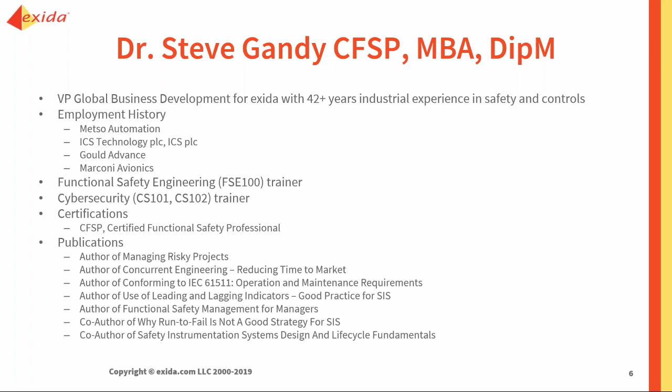Now, with that being said, let's get into the meat of the presentation. So the question is, do you follow good site safety practices? And this is a question that I often ask when I'm teaching the class with end users, because most end users, certainly managers, if you ask the managers, they all say, yes, of course we do. But if you ask the actual maintenance people or the operations people, they have a somewhat different view. And again, what do we mean by good site safety practices?

Well, in this case, it's how well do we carry out the work of maintaining mechanical integrity and also repairs. And here again, if you've ever looked at the Chemical Safety Board accident analysis, the videos they have, and they're very good videos and the animations, you would see that in most cases there have been lapses or severe lapses in the approach to doing mechanical integrity and maintenance.

And in some cases, it's just a case of ticking the box and just making sure, okay, yeah, we've looked at that, that's good, let's move on, without actually implementing proper repairs. So it's more or less just putting a Band-Aid on something and not really following through to make sure it's done properly and it's been properly reassessed.

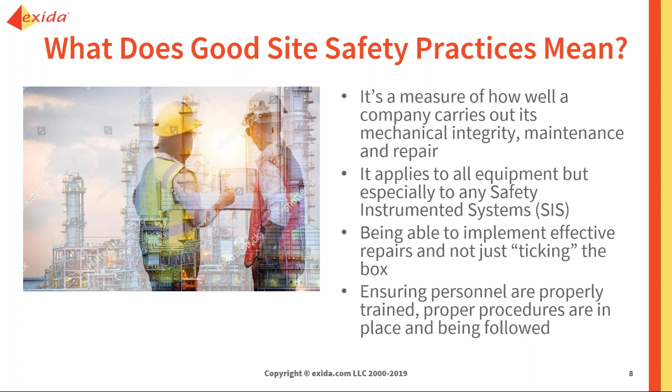Systematic errors are insidious. They can only be removed or avoided by one of the 3 Ps, which is making sure that the personnel involved are competent and trained to do the work, making sure that the procedures in place are being followed, and that we have a paper trail. The 3rd P is the paper trail, to make sure that we can prove we're doing what we say we're doing and we're doing it correctly. So this is all part of maintaining good site safety practices.

And do you actually know how good your practices are? Because again, most companies don't really measure it. And as you can see from this picture, this is a pretty unique situation. Well, not unique actually. It's a situation that can occur. Is he following safe practices? Absolutely not. So again, as I've said, if you ask many company managers, they believe that they do follow good site safety practices. But again, that's a view. They don't necessarily have the metrics in place to be able to measure it and to be able to show that they're doing it correctly.

So there is a simple method that we can use, and that is using a site safety index model, which is basically a sort of semi-qualitative way of assessing what the capability is.

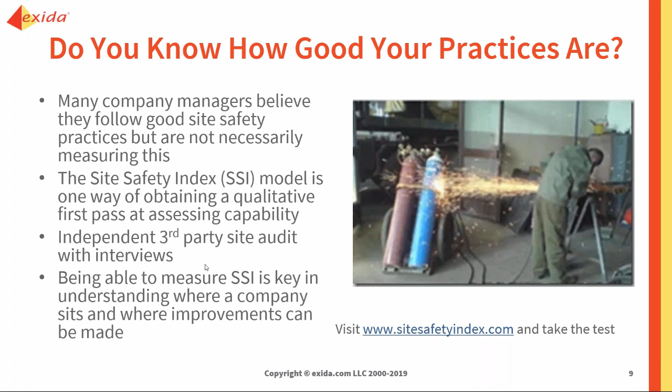And we do actually have a website that you can visit, which is called the Site Safety Index website. And that has, I think, a list of about 40 questions that you can go through. And again, it's semi-qualitative. So you'll get a feel for where you sit. And it's a first pass.

So why is the SSI important? As I mentioned earlier, when the Chemical Safety Board has looked into some of these accidents, what they've found is that oftentimes there is a combination of things, such as there's a poor site safety culture. Management isn't really committed to doing things correctly. They're more interested in efficient operation and keeping the cost down as far as possible.

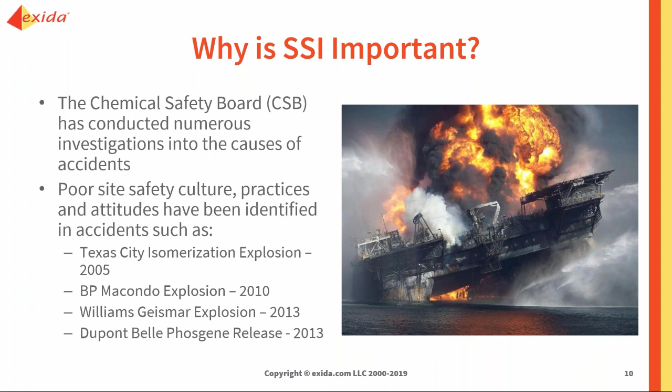The other thing is the practices and attitudes. These have also been an area where things have not gone well, and again, that can be linked back to culture. If the culture is punitive, in terms of we don't want to hear that there are problems, you just get on and do what you need to do, we just have to keep making money and keep our costs down. And when you look at these investigations that have been done, you can see Texas City is an example of that, even Macondo, and then the Geismar explosion in 2013 and the DuPont Belle phosgene release in 2013. Those were traced back to poor site safety practices.

So what is this SSI model? Fundamentally, it's a simple qualitative model that's using concepts from 61508. And there are 5 levels. We talk about SSI 0, where virtually nothing gets done properly. You know, repairs are not always done. This is where the culture is not good. Manpower may be low. They've got too much to do. Yes, they know there's a problem. We'll leave it in bypass. We'll get to it whenever we can get to it. So that's the sort of thing.

The testing isn't done. There's normally a run to fail policy where equipment isn't replaced until it fails. And we know that when it comes to safety instrumented systems, that's a no-no. You have to make sure you follow the useful life of the devices in each of the SIFs and make sure that those are either replaced or refurbished when they get to the end of their useful life. So that means you have to have a good tracking system and you have to follow good maintenance and mechanical integrity. So from 0, you go up to 4, which of course means you're doing everything correctly, you're using data correctly, you've got everybody trained, and this is the highest possible level you can get.

Now, in our exSILentia tool, we do have the SSI included in the tool. It's part of the Markov modeling. And we normally assume good. So it defaults to SSI 2, where repairs are usually correctly performed. Testing is done correctly and mostly on schedule. Most of the equipment is replaced before the end of the useful life, and it's selected according to specified environmental limits and process compatible materials.

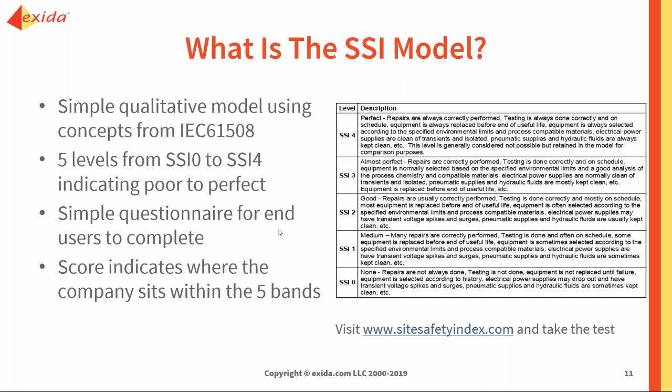So what are the important factors that can impact our site safety index? Again, part of it is equipment selection and qualification. If the equipment hasn't been selected correctly for the environmental or the operational conditions, then you might argue, well, why would you not select the right equipment? Well, sometimes that happens, that the engineering company isn't fully aware of the end operating environment, and if it's not in the specification, then this can be a problem, because it means we'll probably have more breakdowns, more failures, and it'll require more attention.

How well the testing was done during commissioning. If there wasn't proper and thorough testing, we may end up with problems turning up later on during operation. The safety validation test, if that wasn't done properly. And again here, if we have a safety instrumented system and we are following 61511, we should have done an FSA 3 before we start up. And I have had discussions with end users who have not done FSA 3s. They've done a PSSR, but they haven't done a proper validation.

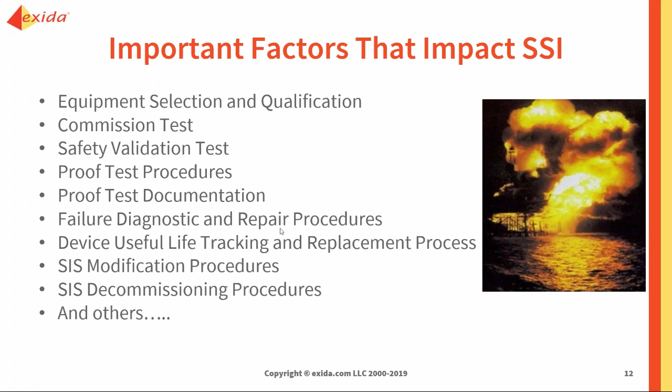So here again, we could do our analysis right, we could design our system correctly, we could have our SIFs all nicely designed to meet the right SILs and everything else. And once we get into operation and maintenance, if we don't do the maintenance according to the SRS requirements in terms of the proof test intervals, the mean time to restore, tracking useful life, making sure we effect proper maintenance, we keep records, all of that will very quickly deteriorate.

And this is one of the reasons why in the 2016 edition of 61511 they introduced the requirement for a stage 4 FSA. I just did a webinar yesterday on why do we bother with FSAs. But the stage 4 FSA requirement is to be able to look at our performance. Remembering, of course, that the 61511 standard is a performance-based standard.

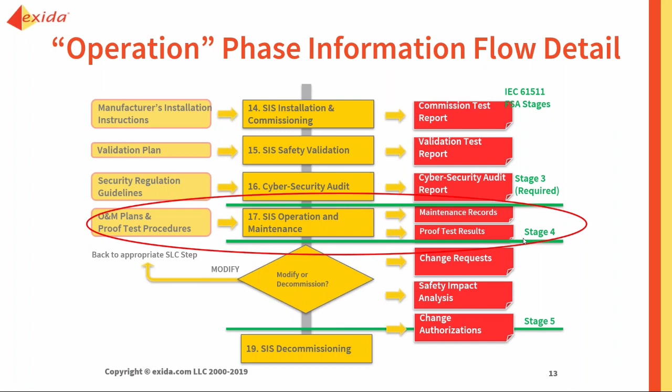So all of that information can then be used in the PHA revalidation, especially when it comes to initiating event frequencies, to see, okay, did we get it right the first time or did we not? And we can modify accordingly. So again, if we don't have the proper performance indicators available, we won't be able to measure performance. And then again, if we're not following good site safety practices, then we are going to have problems, and we won't achieve the performance that was originally intended from the original design.

As I said, we're performance-based, so therefore we do need to measure. We need to know how well our SIS and its SIFs are doing in terms of the risk reduction. Is it still performing the way we need it to perform? And that means we have to have the appropriate metrics in place to do this. You can, of course, use leading and lagging indicators. There's another webinar completely dedicated to leading and lagging indicators, plus there's a paper on the website on leading and lagging indicators.

But ostensibly, lagging indicators are things that have happened in the past that we can learn from, whether they're incidents, real or otherwise, near misses, maintenance issues and problems, failures. All of those things are historical, and we can use that because if we've been getting a lot of these problems, we should be able to reduce them. The leading ones are to give us an indication of the likelihood of having a problem in the future.

And of course, for example, if we're not doing the inspections correctly, if we're not doing our proof testing on time, if we're not training our people, if we're not doing the assessments that we need to be doing, then the likelihood of having a future event is now beginning to increase. So this is why it's important to be able to measure the performance.

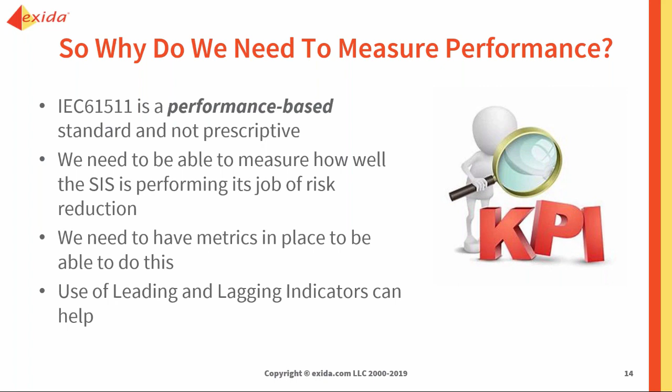And this comes back to what I was saying about the site safety capability and it hinging on the two things being culture. And again, if the culture is not there, it is very difficult to be able to go to management and say, look, I have to replace these devices because they're coming to the end of their useful life. And if the manager says, well, why? Have they failed? And you say no, then of course the pushback is going to be, well, why do I need to change them if they haven't failed? Why should I spend that money?

So this is another problem, and that plays into the ability of maintenance people to be able to follow good site practices. So therefore the management team has to buy in and support the overall process safety approach. This also means that we have an open and learning culture because, again, if we're using our lagging indicators and we've had problems in the past, we should learn from that and be able to modify accordingly, whether that's some further training that needs to be done or whether it's a revision of procedures or the addition of new procedures, whatever it takes to do it.

So doing things right and doing the right things should be the mantra. And what do we mean by that? Well, we make sure that our O&M personnel are properly trained and that they are following the procedures. If the procedure is not correct and you find that they're not following procedures because they believe the procedure to be cumbersome or it's not written correctly, then that needs to be looked at and that needs to be changed because that will be a potential systematic issue.

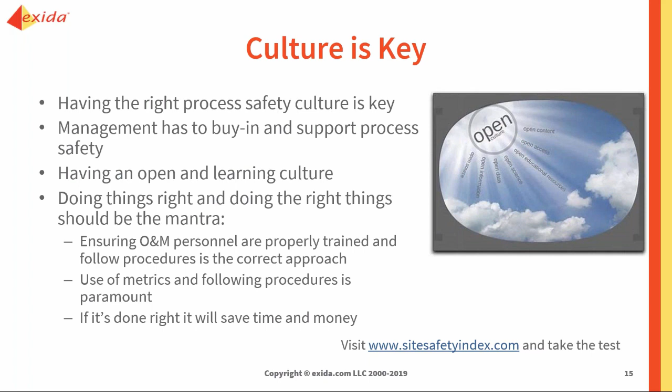If we have the right metrics in place and we're following our procedures, then we should be able to accurately measure our performance. And again, if it's done right, it will actually save time and money. Here again, what you find is that companies that are at the lower end of the SSI spectrum experience more outages, more downtime, because they have a lot more spurious trips or they have equipment failures. So that costs money, plus every time you have to start up, that is a potential high risk situation.

So what are the specifics? As I mentioned already, we have to carry out an FSA 4, and it uses the word periodically. And you can set the time. End users can set the time. Whether you decide to do an FSA once every 5 years, whether you decide to do it once every 2 years. I've had situations where companies will look at, okay, if we've got SIL 3, we need to be looking at that probably more frequently.

But again, it's really down to the overall performance. If we're not getting a lot of incidents and problems, then the 5-year window may work. If we're getting trips and problems, then maybe we want to be looking at it much more frequently than 5 years. So again, the point is that the end users can set that themselves. However, they need to do it. It needs to be done. So we should be doing that. And I have actually been doing some FSA 4s for some clients. I mean, it's been 3 years since this came out with the 2016, and still companies are not doing it.

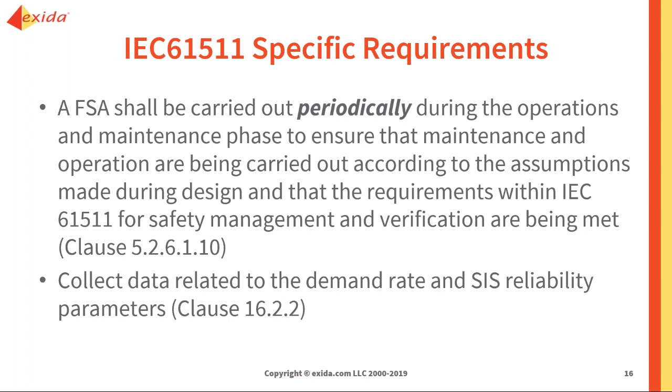So what needs to be measured? Again, when we did the design, we identified key parameters. So of course, proof test intervals. Everybody hears about proof test and proof test intervals and what is a proof test and what isn't a proof test. Let's not confuse a proof test with a functional test. And a proof test should be designed to find potentially dangerous faults that any automatic diagnostics can't find.

And this is where, when I teach the class, the euphemism I use is RTFM, read the flaming manual, because the safety manual will give you suggested proof tests. If you're using exSILentia, then you can do that automatically with the tool. But if you're not, then you need to be looking at what the manufacturer's recommending for the particular device, and then create a proof test for the overall SIF that will meet a certain level of coverage in terms of the ability to find potentially dangerous faults.

So it's not a functional test, it's an entirely different test. It may encompass part of the testing we would do as a functional test, but it's not there to prove that the SIF works. It's there to find potentially dangerous failures. So it's important that we follow the timing.

And here again, I had one client that came to us because the engineering company, in order to meet the target SIL, had come up with a 3-month proof test interval without consulting the end user. And the end user was telling me, well, there's no way with the number of SIFs we have and number of people we have that we can do 3-month proof tests. So we're already set up to fail. So again, that has to be looked at pragmatically.

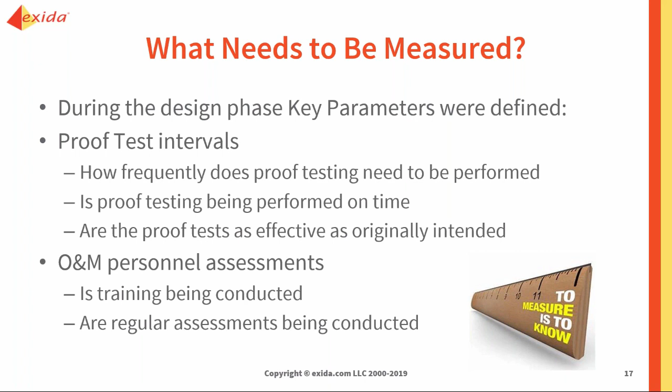So what do we need to record? Well, we need to look at demands on the SIS, whether they're actual, real or false, and then any incidents or near misses. So if a relief valve goes off, that's obviously something that's not right. It's an indication that all is not well. And then we need to look at that and find the root cause of that. We obviously need to record both random and systematic failures.

This is an area that gets confused very often because most of the time people think that failures in the field are all systematic. Not necessarily. And in fact, when we do our probabilistic analysis and calculations, we base that on random failures. So the adage that I suggest to most of the training classes I've done is that the assumption should be random until proven otherwise, because then you log it as a random issue, and then later on, if it turns out to be a systematic issue, that's different.

So for example, if manufacturer A has a pressure transmitter and it fails in one of the SIFs, and we replace and restore, and then 3 months later the same manufacturer's device but in a different SIF fails. So again, these would be random, but now there may be a potential systematic: why is this particular manufacturer's device failing? Is it because we're not using it correctly, it's not been set up correctly, or is it not really suitable for the application? So these things would have to be looked at, and that's part of getting down to the root cause of it. Proof testing, recording the results of proof testing, including the as found.

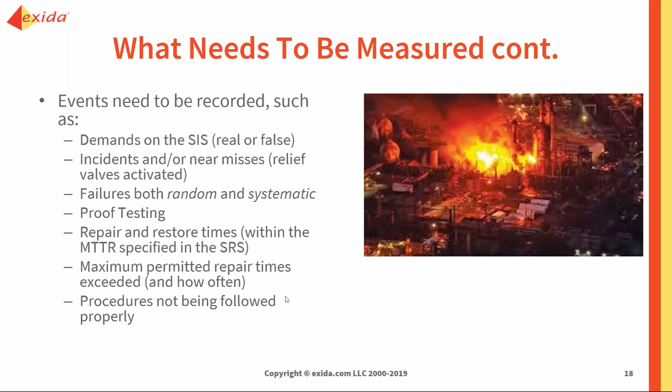And are the procedures being followed? If they're not being followed properly, then that's another issue that we need to be able to track, analyze, and then correct. So this comes down to, again, our site practices. As I mentioned earlier, with this performance measurement, if we've got the right approach in terms of culture and practices, we should be gathering good quality data that we can use when we revalidate our PHAs. And like I said, if you're an OSHA PSM site, you have to revalidate every 5 years.

We can also, at that point, assess whether the proof test intervals are still valid or not, or can be extended. If our performance is better than we originally anticipated, then we can look at potentially extending out the proof test intervals, which will save us a bit on maintenance costs. It'll also enable us to confirm any assumptions that we've made on the demand rates and the hazard frequencies. How often are things occurring, and are they within what we originally thought? So this is another reason.

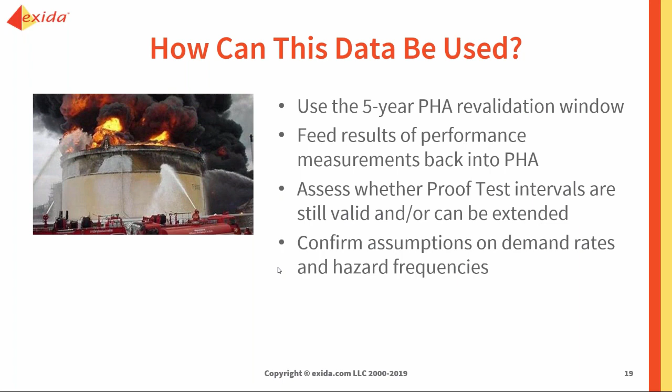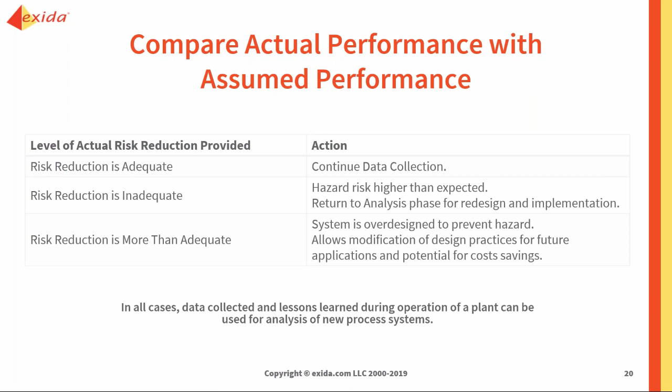And this again comes down to, if we're following good site practices, doing maintenance and mechanical integrity diligently, recording everything, then we should have good data that we can use. Because what we want to do is compare the actual performance with the assumed performance from the original design. So is our risk reduction adequate? If it is, fine, we can continue collecting. If it's not, then we can go back to the analysis phase and look at maybe a redesign or some form of change. If the risk reduction is more than adequate, a potential over-design where we've overestimated the hazard frequencies, then that allows us to modify our design. But the point is that all the data collected and the lessons learned during plant operation can be used for analysis and for future performance.

So that then brings us to summarize where we are. So if we have the right approach in terms of culture, in other words, a safety-first culture, where we have properly trained and competent O&M personnel with good or better site safety index capability, in other words, we're getting towards SSI 3 and SSI 4, that's where we want to be. We should be making sure we monitor this, and we can do that as part of an audit. So when we do our performance reviews, we can also look at how well are we doing from the site safety point of view, site safety index point of view.

This means that we need to have the proper operating and maintenance procedures in place, and that they're obviously being followed. I'm a great believer in checklists, those people that have been on the course have heard me say this so many times, but I always refer to the pilot analogy, that commercial pilots, doesn't matter if they've been flying umpteen thousand hours, every time they get in the cockpit, they don't rely on their memory. They get out their safety checklist, their pre-startup checklist, and they go through it and make sure that it's correct.

And therefore, if we develop a safety checklist, then we can ensure, number one, consistency, and number two, we don't miss anything. We can also look at developing and maintaining some leading and lagging style indicators. That's very helpful and useful. We should be doing the regular employee competency assessments, and again, that would be recorded as part of performance. And making sure that proof testing is conducted in line with the SRS.

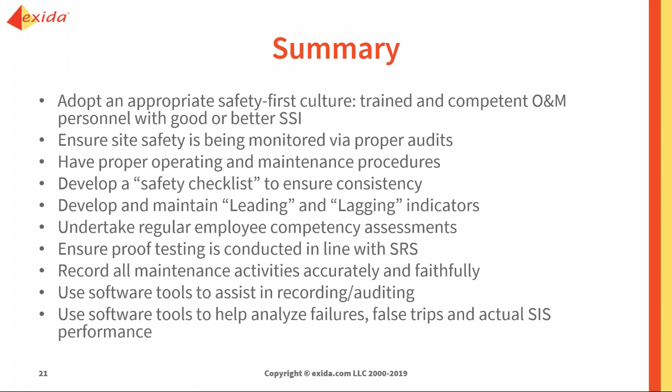The use of tools can obviously assist in recording and auditing, as long as the tools are appropriate to be used. And they can also help us with analyzing failures, false trips, and our actual SIS performance. And those of you using the exSILentia tool, if you've looked at SILStat, that's another extension of exSILentia that can help with this. But there are different ways of doing it.